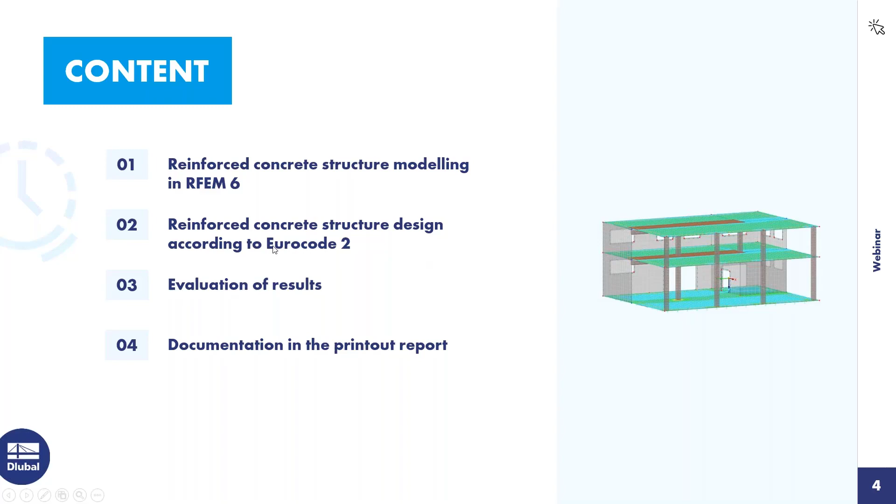Reinforced concrete structures according to the Eurocode. I will design also a T-section here under the slab. Then I will evaluate the results. I will discuss the results, and will show how we can work with the graphical display of the results, and also how we can print the results into the printout report and document our calculation. I go now directly into the RFEM structure.

The structure, the members and the slabs, was already defined. I only give you a short overview of the used objects. The basics of the reinforced concrete design, the design of members, the reinforcement, and also the design by using the member representatives if we have more similar members, was shown in the first webinar for reinforced concrete structures, which was shown in November of last year. There the basic steps are shown, how you can define the properties and the settings, and my colleague Caroline will write the link into the chat where you can find this webinar. It is very good for the beginning.

So therefore, I will go today especially into the design things which weren't shown in the first webinar. The punching design was not so detailed, and also not the rib design. The structure is a concrete structure with C30/37, and I use sections for the columns with 450 by 450 millimeters, and I have already prepared a section for the T-section, which is named in our program as rib. In the following description, I will always use the name rib for the T-section.

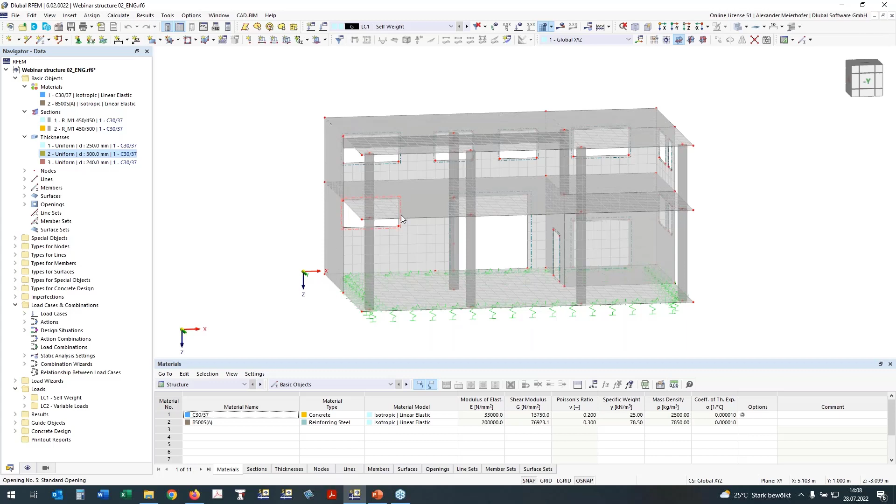The building now has elastic springs, so elastic support, and this will have also influence later in the settings for the deflection design, which I will show you.

At first, I want to deal with such nodes where we have the connection between the columns and the slab. Here we should place mesh refinements to have a better FE mesh.

For this, I go to the data navigator, where by double click I can open a new nodal mesh refinement, give there my settings, which I have for radius 1 meter, and the inner target FE length is 15 centimeters. It comes from the dimension of the cross section of the columns.

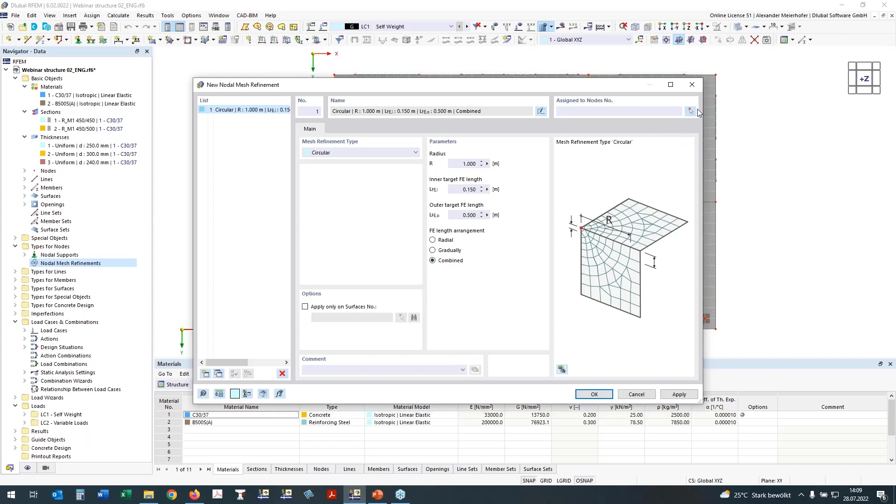For the length arrangement, I use the combined approach, and now I will assign the nodes with two rectangulars where I want to have the refinement. If we take it through in the isometric view, we will see I have it caught, and everywhere was now my mesh refinement.

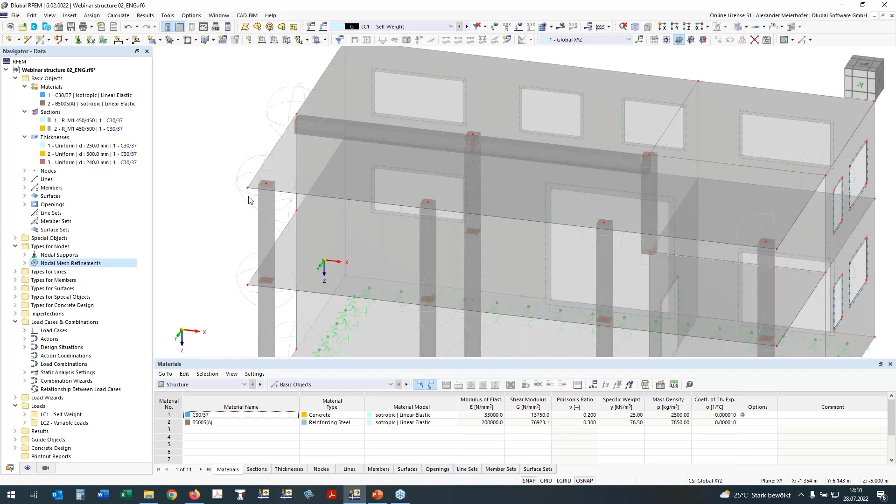On these nodes, from the column and the slab, we have also singularities, and how we can deal in the concrete design with these singularities is described in a very good knowledge base article on our website, which I want to advise you. Caroline will also send the link to this technical article in our chat, so you can find it very easily.

I will continue and select one approach, which is the use of the surface result adjustment. It means I will select or define the area which is exactly the width of the column, and set there the inner forces of the surface to 0.

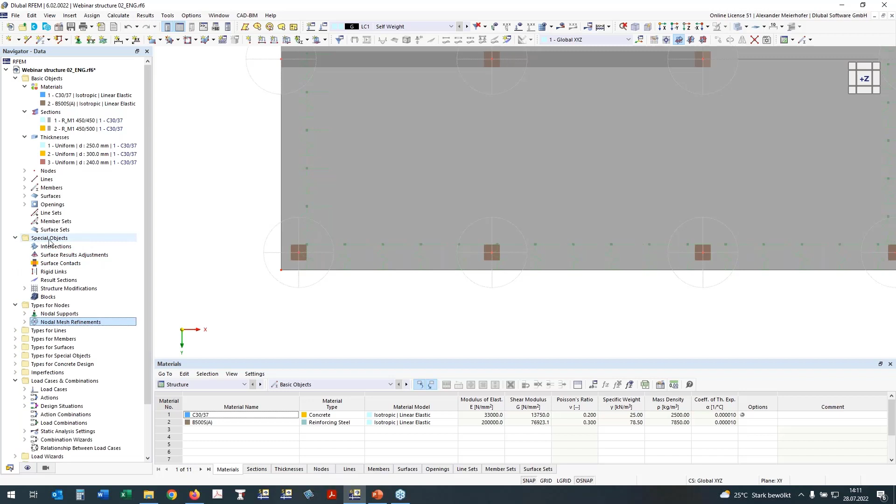Surface result adjustment can be found on the special objects. By double click, I can open the dialog, and now we can define a new rectangle result adjustment with the dimension of our columns.

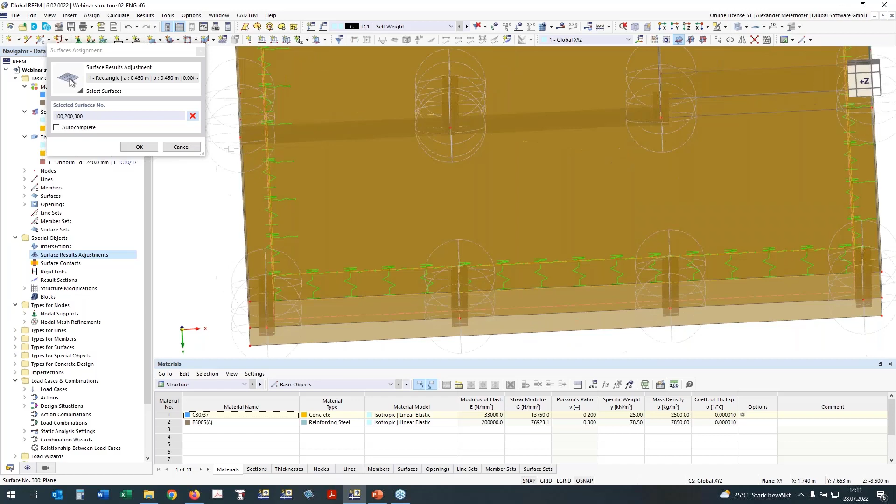I want to have it on all 3 surfaces, and you see the number of my surfaces was so chosen that I know where it is placed. So 100 is the slab on grade, 200 the slab over the ground floor, and 300 is the slab over the first floor.

If I press OK, I have already assigned the surfaces, and now I have to define the center of my adjustment. Here by copy, I can simply copy this adjustment and set only the new center of the result adjustments, and then I will have it in all areas.

I make one new and want to define it also over the wall. The width is 25 centimeters, and I defined a little bit bigger area, and defined it here because here is a wall. Define it also in this area.

I made one mistake. Now I forgot to define the adjustment type. I want to set it to 0, and I want to set all inner forces to 0, and this should be done for all defined adjustments. So I was one step too fast before. This should be done before I copy it, and then it is also always in the right setting.

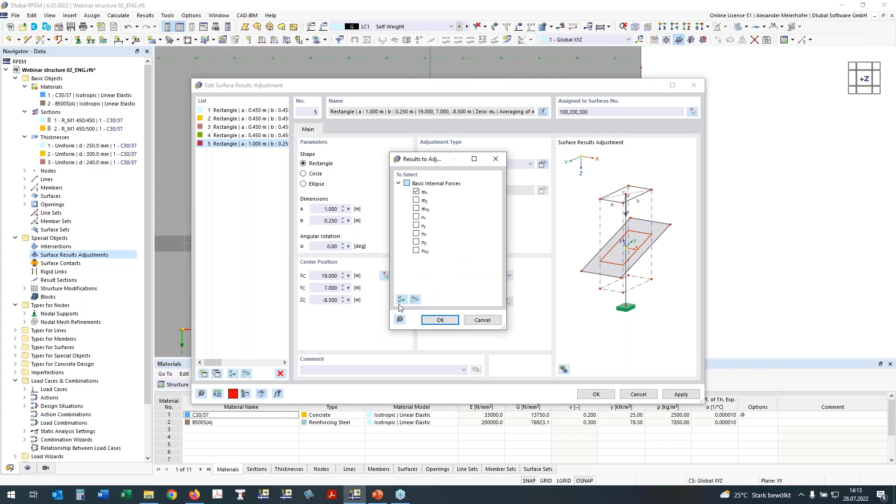By OK, it will be placed. We can see it, and we can also work here by drag and drop. We copy it by drag and drop. If we press the Control key, you can put it by drag and drop, and it's very simple to work with it.

So this is then for the connection of the columns to the slab. One additional setting for the slab is necessary. I want to have here hinges over the length of the supported line.

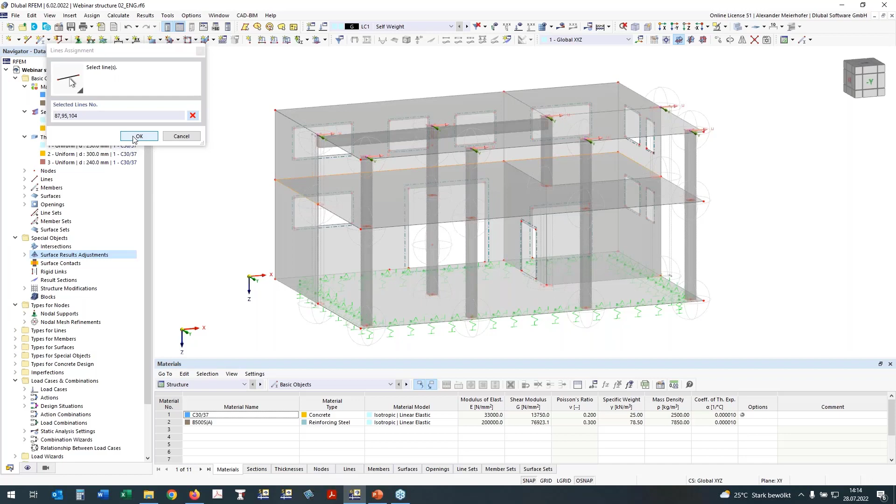The definition is very simple. We make double click on the surfaces, and the edit surface dialog will open. Activate hinges, and in hinges I click to select lines, press Control, and then I have selected 3 lines where I want to have hinges, and the hinge type is as default already the moment hinge, and I will put it to all lines, the line hinges number 1.

Okay, it's ready now, and if we take a look at our refinement, it is everywhere placed, and also the adjustment. In the display navigator, we can deactivate the mesh refinements because I don't need it anymore for the work now, and the graphic is then more clear for the presentation.

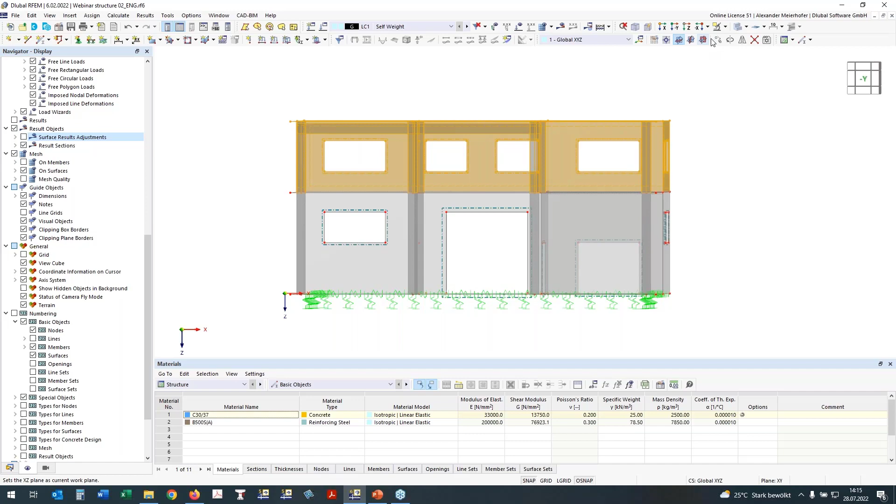As next step, I will define the rib for the slab over the ground. For this, I will hide the first floor by selection, and now I have the first floor.

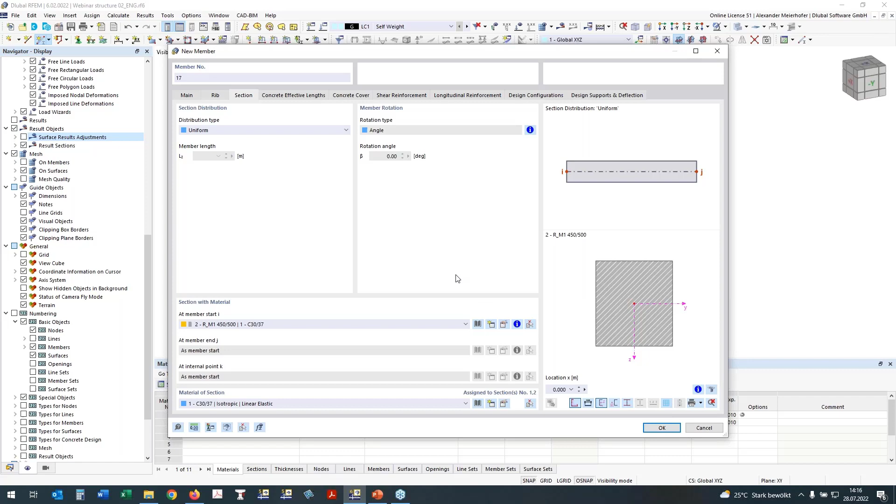By using new member, I can define now section rib by selection of the section number 2, which should be used for the web. The web should be 500 millimeter high. I can define now the rib from here to here, and also from here to here. Oh, something was wrong. Okay, I do it again.

I know what was the topic. I will make the selection new and select only the slab which I want to show. So the new member is the same section, section number 2, and then from here to here.

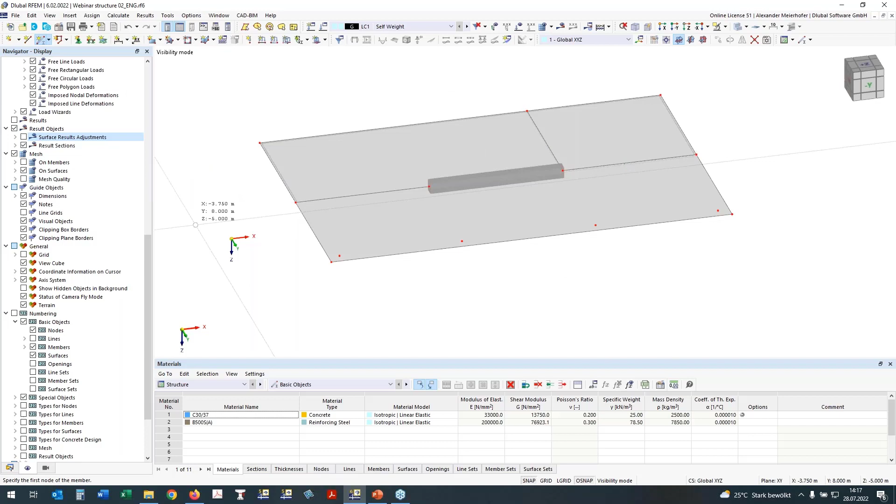By escape, I come to another point. So if we take a look to the complete view, we see here in the first part I took care about the rib. I go now in the rib section, and this is a very new feature that we can now also define more sections or segments during one length of the members. This is completely new developed.

I use here the calculation of the width, integration width according to Eurocode 2, and the splitting of the segments can be done in 50%, 85%, and also 100%. And we see now we have more different integration points. Here we have an inner support, and it means we have to consider also for the calculation of the integration width the length of the neighbored span length. So I have to define here 180, and I have now my different integration width.

We have here also a new option that we can make here a distribution, a linear distribution from the integration width, and now we have defined the rib for the design.

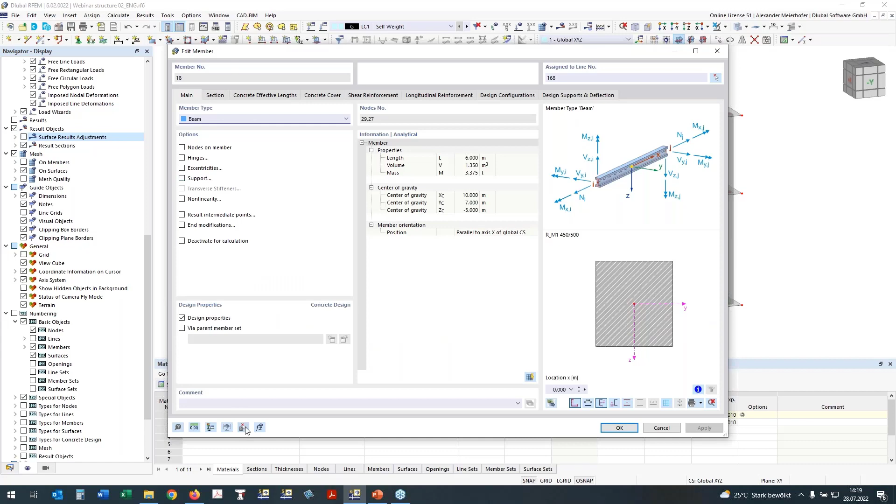For the second member, I use here the copy of object selections. It's a very nice tool. If I click here, we have here really copied all inputs. It's a rib, and only the thing which I have to change is that the end field is related to the segment, and this is for the user-defined point 80. And then the inputs for the static analysis is ready.

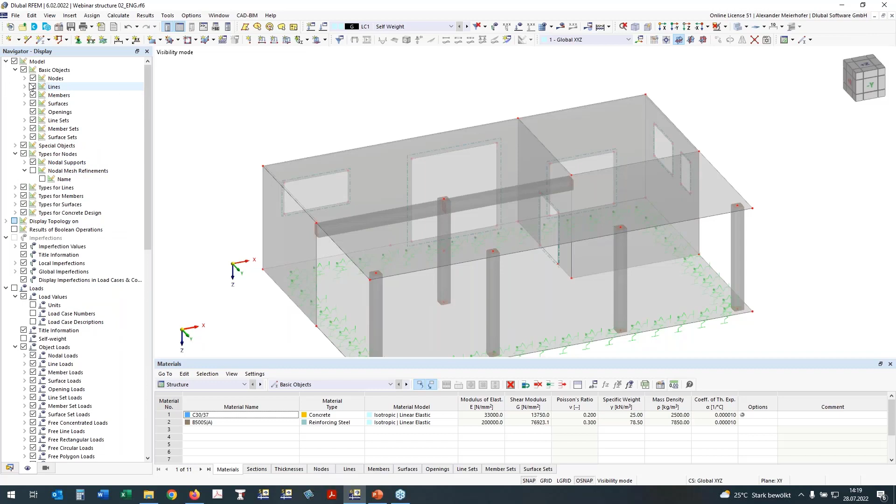And now I do it again, what I did before. And a very nice feature from RFEM 6 is now that we can show the rib section also in the graphic, and we see that the integration width is also shown here in our main graphic of RFEM.

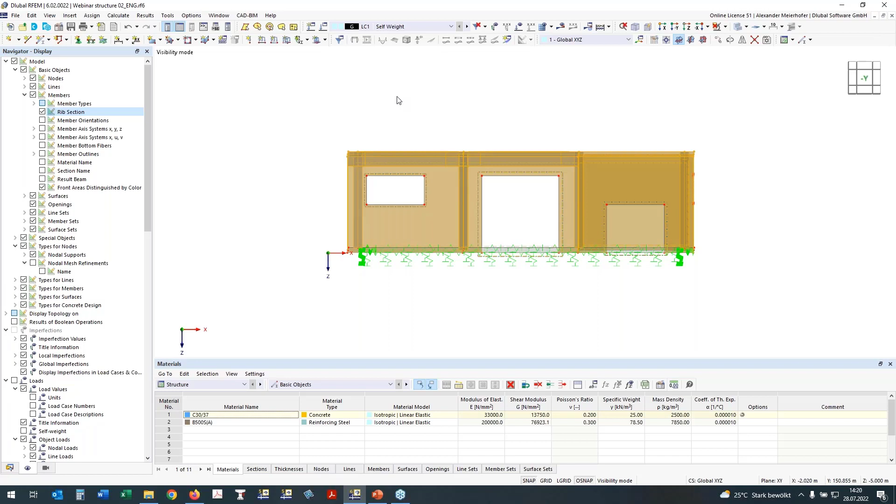Okay, now I will select again my slab here, and will continue with the definition of the design properties. The design properties for the reinforced concrete calculation are activated by double click. I come into the surface dialog, and I continue with the concrete cover.

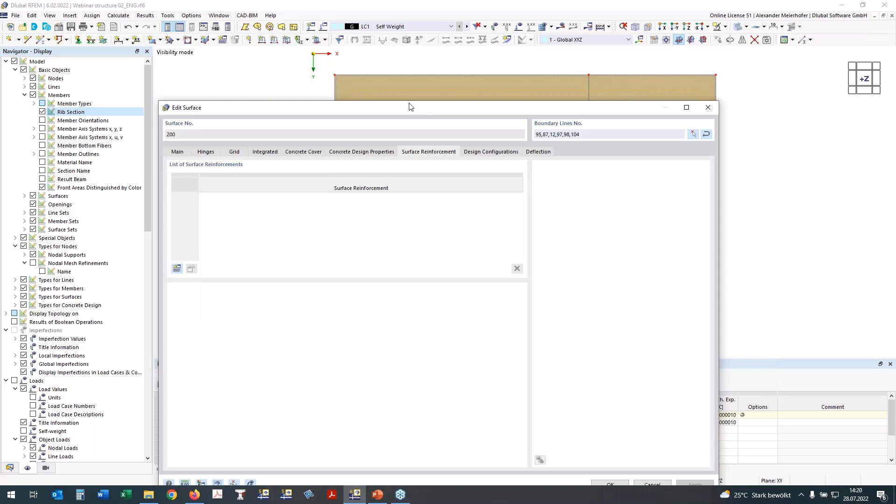The concrete exposure durability is defined by the exposure class, which is default to XC1. This is what I let it be, it's okay. The design direction of the reinforcement is the first direction goes in X. This is also default, which I will not change. And here is one important topic. In the surface, I need a surface reinforcement for the diameters so that I will know the static depth for the calculation. I just design a type of basic reinforcement.

Which will be in both directions, the diameter 10 with a distance also 10 centimeters, and by pressing OK it will be then assigned to the surface. Here are listed design configurations, which I don't discuss today. This was in the first webinar very detailed. I will later take a look to the serviceability configuration.

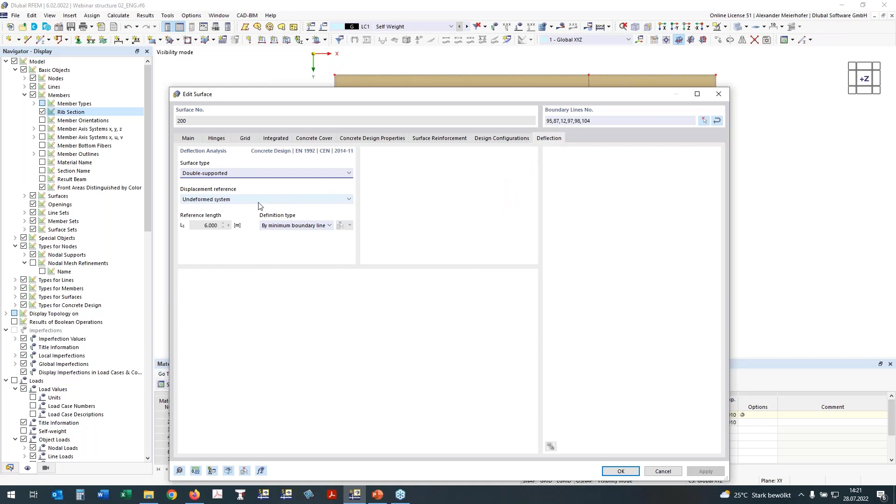But here's one very important thing, which I mentioned before at the beginning. We have an elastic supported structure. Therefore, it is an advantage to relate the deflection to a also deformed slab or plane. And here I use the parallel moved slab as a reference plane for the deformation, and as reference length I will define it manually by 2 points and say my reference length for the maximum allowed deflection is from here to here. It's about 5.5 meters. By OK, I have defined all properties for the reinforcement design.

We can also take a look to the graphic. If we go to the types of concrete, we see here we have surface reinforcement longitudinal, and if we activate it, we see that the reinforcement is defined in this area.

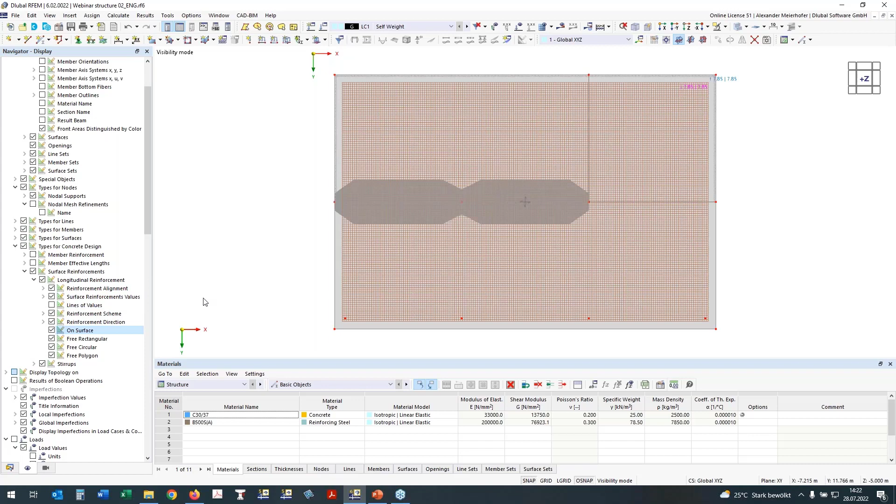Okay, I said that I will take care about the punching design of the nodes which are here. So it is like for all objects, we have to select it and go into the nodes or object dialog, edit nodes, and activate the design properties. Here it is only now important that we have to check for design of the punching groove, and then we will have here also assigned the punching groove in the add-on concrete.

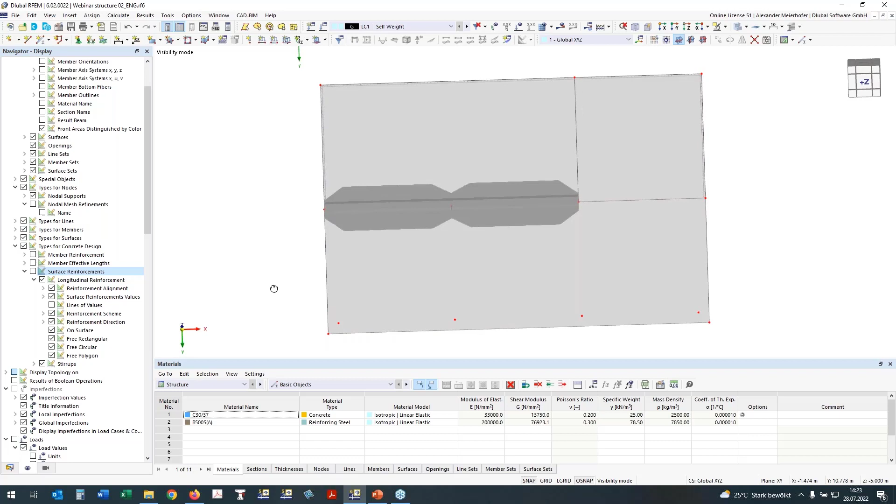I will go now to the definition of the ribs. Here we need also reinforcement. I want to design it not with two members, but with a set of members. So therefore I select both, press Control key, and say create a new set of member.

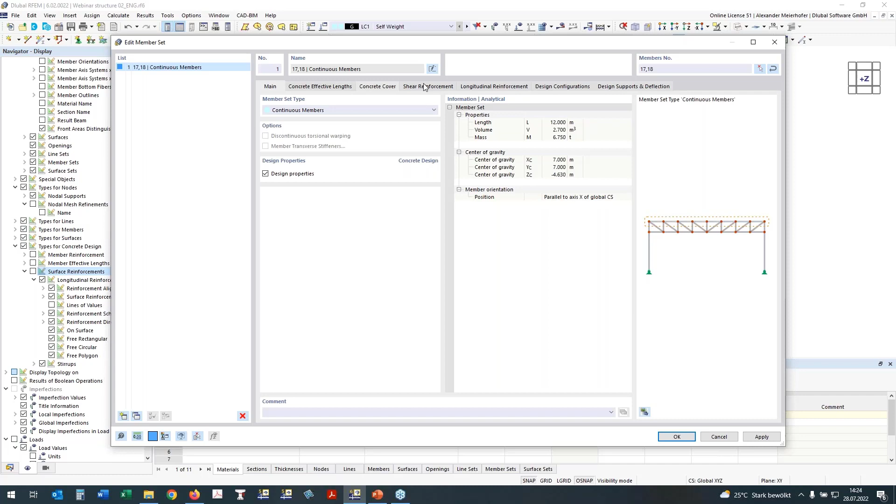And here we have now the new set of member, and I can say design properties for this set of member, and we see that there are now open all inputs for the design properties. It means the concrete cover is now shown, and here we have also the same durability which we have already used for the slab, XC1, and the shear reinforcement.

I will change the distance to 50 centimeters, and if we take a look in another view, then we see here the cross sections or the variable cross section of the rib is already shown here, and also there is the reinforcement, and I will go to the longitudinal reinforcement.

We see here the reinforcement which we have defined for the slab design is here already placed. If we go more, we will see it. It is activated by this icon. If somebody doesn't want it, you can deactivate it or let it. I want it, so therefore I will let it here.

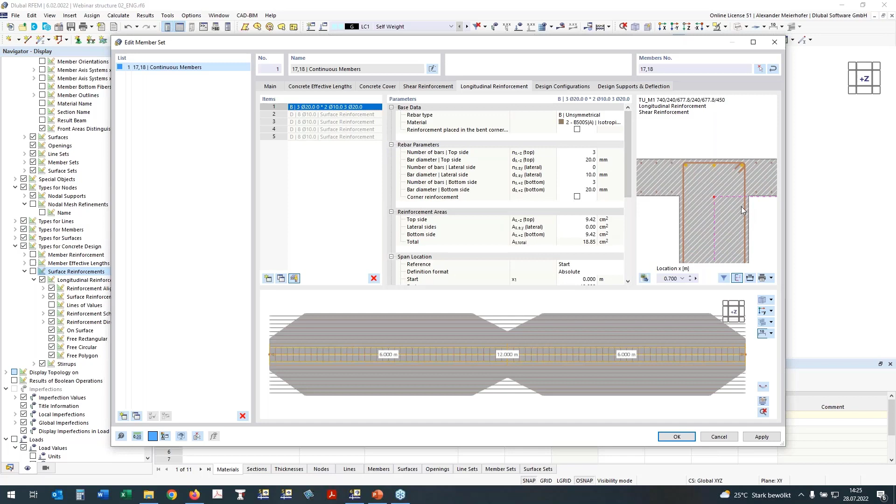But I will define now a different distribution of the longitudinal reinforcement. I want to have it unsymmetrical here in the web. So therefore on the top side I will define here these three rebars with diameter 20, but a lateral reinforcement also from 2 diameter 10.

And on the bottom side, I want to have 4 diameter 20. And it will be directly updated here in the graphic. Here is also the 3D graphic of the reinforcement, which can be used for control of the inputs.

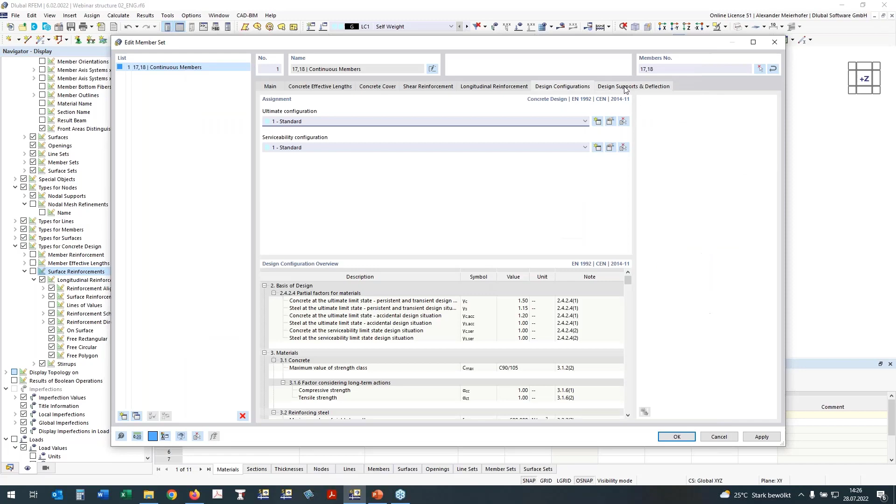Here we see a small reinforcement drawing, also the used shear reinforcement, which can be activated or deactivated. It's nice for control and for printing. Okay, I can close it. Design configuration is the same like for surfaces in all parts, and now is one important tab.

We have to define now the deflection properties or conditions. I want to check it only for the deflection in Z direction for the gravity loads, of course. And here is the point: my reference is then the deformed segment ends.

This is now also the point which I mentioned. We have an elastic supported structure, so it means also the supported ends will be a little bit displaced in Z, and this I don't want to have in the design check for the deflection.

Important is that I generate on the ends or on the middle some design supports. We have here design support in Z direction, and our wall is 250 millimeters. It's a monolithic connection, and will be used for the walls on the end and the start.

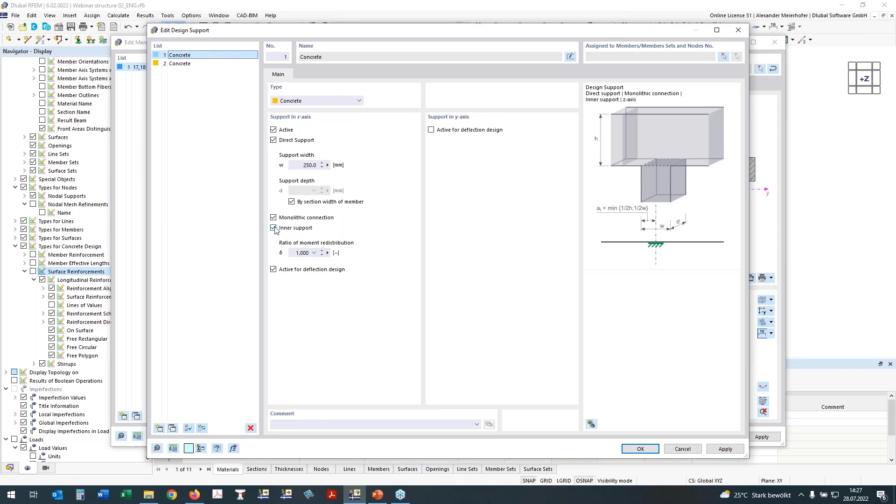I directly copy it and use here also the width for the columns, which are inner supports, and here I have to deactivate inner supports and press OK, and then it will be placed directly at the beginning.

I will change here the view to see it. Here we have the first one, and at the end it will be also placed, with the 250 millimeters width, and in the center I will also use the design support, but it is now for the column and it's bigger, it's 450 millimeters.

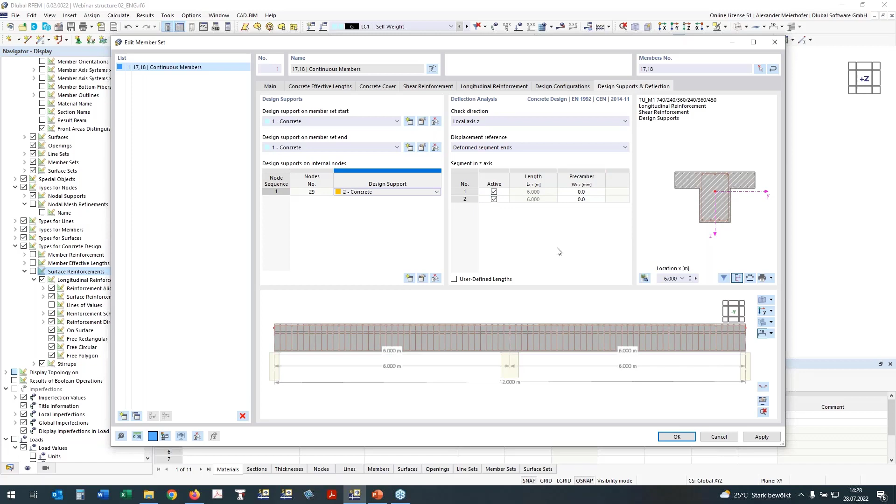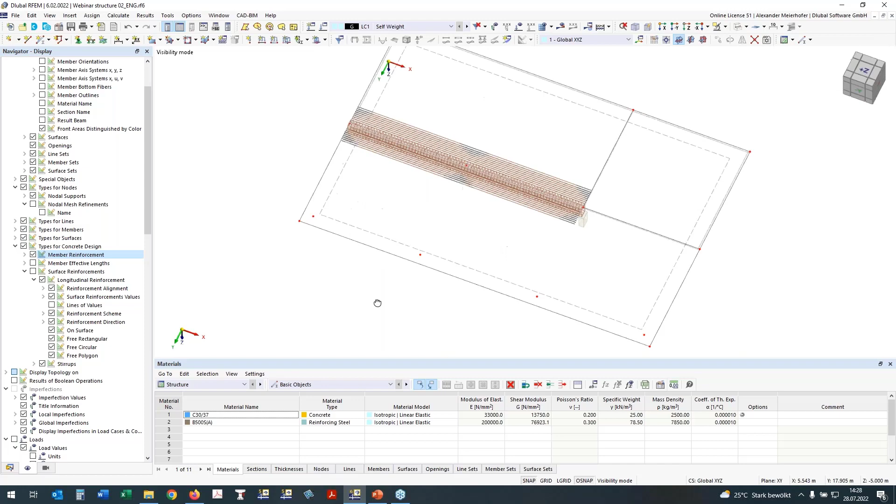And we see here now for deflection we have here some lengths, 6 meters and 6 meters, and if we have some pre-camber we could define it here, but in this case I don't have it. But okay, we can confirm the inputs, and also we can check the member reinforcement and display it, and see that everything is okay.

Before I start with the calculation, I will make now new object selections. Have to be a little bit bigger. Create new object selection, and the advantage which will be done with this object selection you will see immediately after closing the dialog.

This is my slab over ground floor, and I press OK. And now we have here in the guide objects, the object selections, and you see I have already done a little bit more, but the new one is the object selection number 200.

And if I go now to the concrete add-on, I can use the object selections directly to define all objects which are there in the add-on. It is then replaced, and it will only show objects, and it is very good to organize the work.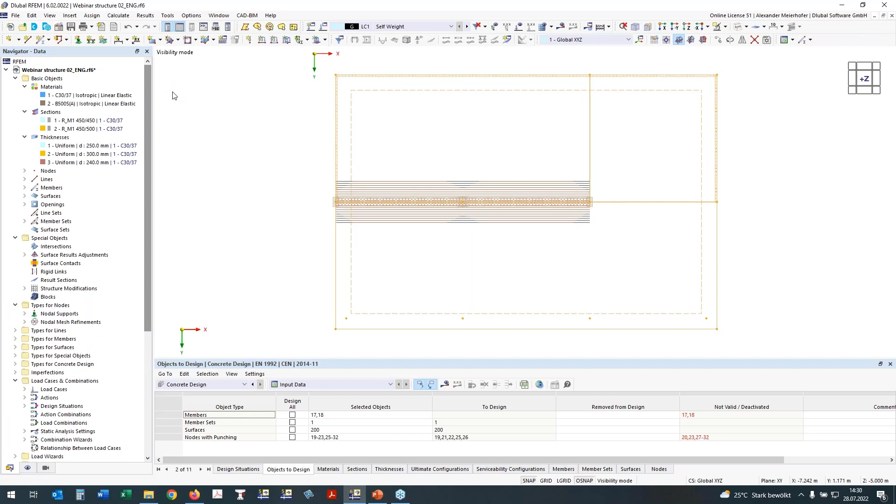Before I start the concrete design, one hint about what you have to check in the basic settings. You have to activate the concrete add-on in the design add-ons, and in the standards you have to define the used standard for reinforced concrete design. Here I will use the Eurocode 2 with the original rules, so without national annexes.

And if we have the loads, this is also one additional hint. I have defined a load case, self-weight and variable loads. We have to define the action category there. It was for office. And in the base data, I have the combination group and the combination wizard defined.

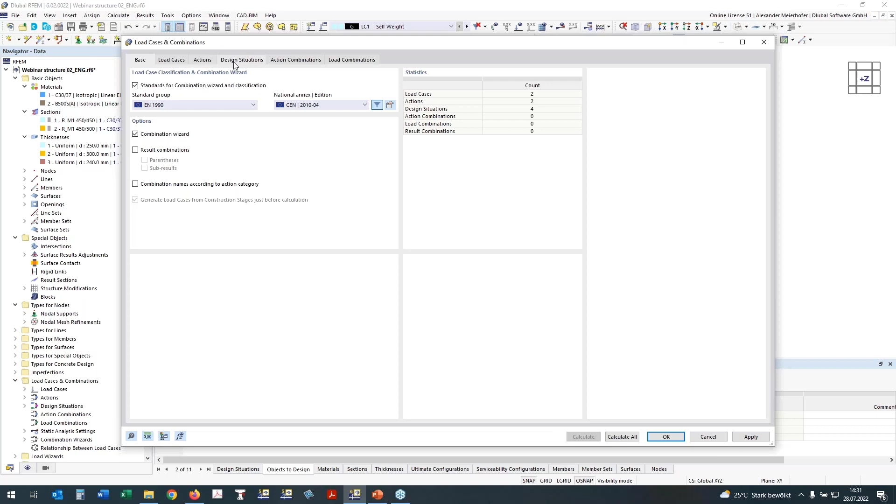And in the design situations the serviceability and the ultimate limit state design situations will then be listed automatically. And here will be the list of all activated design add-ons. Here we work only for the concrete design, so I activated it for the concrete design, and all load cases related to this design situation will be calculated. I can multi-select it, and I have to select my combination wizard.

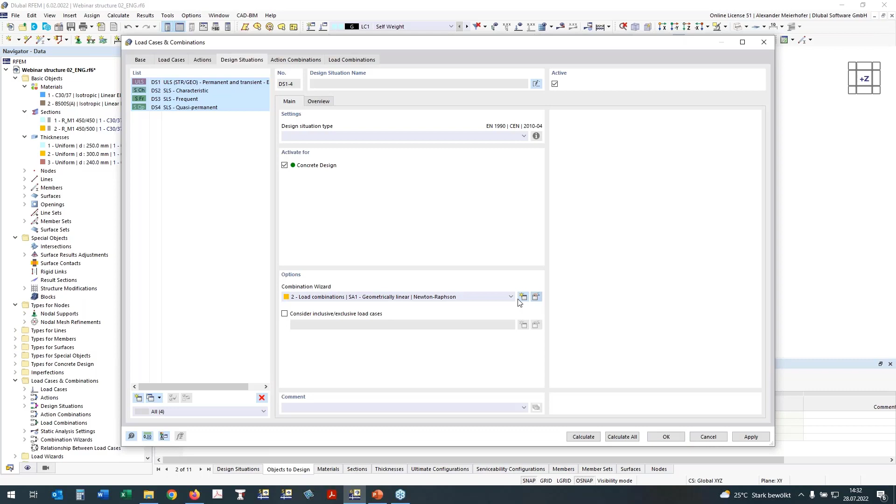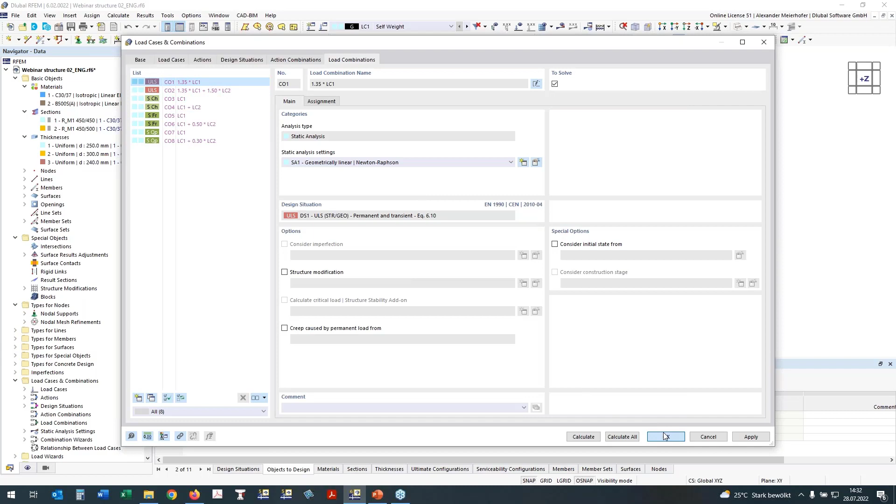The combination wizard here is defined so that we generate load combinations, and the static analysis should be done by first order and geometrically linear. If we go then to the load combinations tab, these combinations were generated automatically and will also be used in the design of the reinforcement.

Now I go back to the concrete add-on. We have here already designed the object selections. Material and sections are only listed for control. Here are the ultimate configurations or settings for the ultimate limit state. Here we have the serviceability state. I will take a look in the serviceability state

configuration, and here we have the stress check, or the crack analysis should be done by finding automatically the limit value for the crack width. So it is according to the defined exposure class. We have XC1, so I expect 0.4 in the calculation. The deflection limit is L, the reference length, divided by 250. And here is the crack state detection for the serviceability.

This I want to explain a little bit more, because this is really new, released two weeks ago. The first one is the crack state calculation for each associated load, so each load case or load combination will be calculated for itself. Crack state determination as envelope of all SLS design situations means the program checks all load cases defined for serviceability and then uses the cracked state, which is the safest setting.

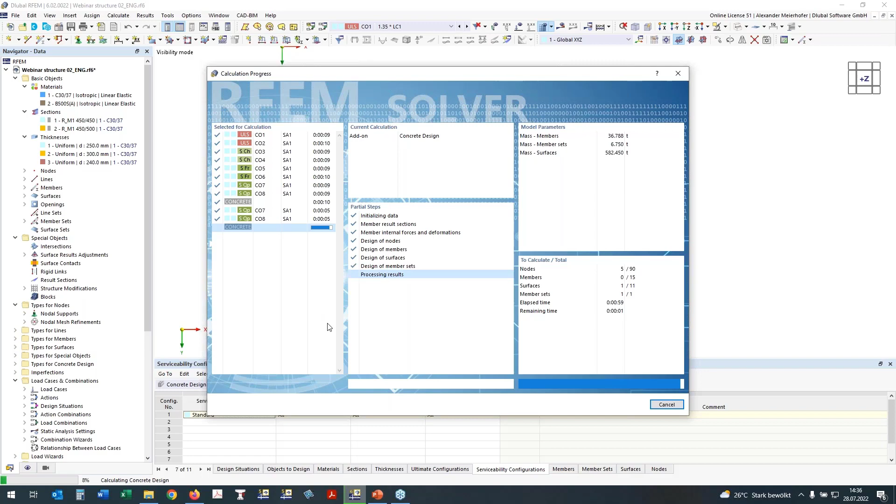Okay, so now we have an overview of what is fulfilled and what not. We have very detailed tables. Working with the tables was shown in the first webinar. Today I want to work more with the graphics and use only the settings for the member. Design ratios of the member we see here. Everything is clear here. I have 2% for the detailing of the spacing, and all design rules are okay.

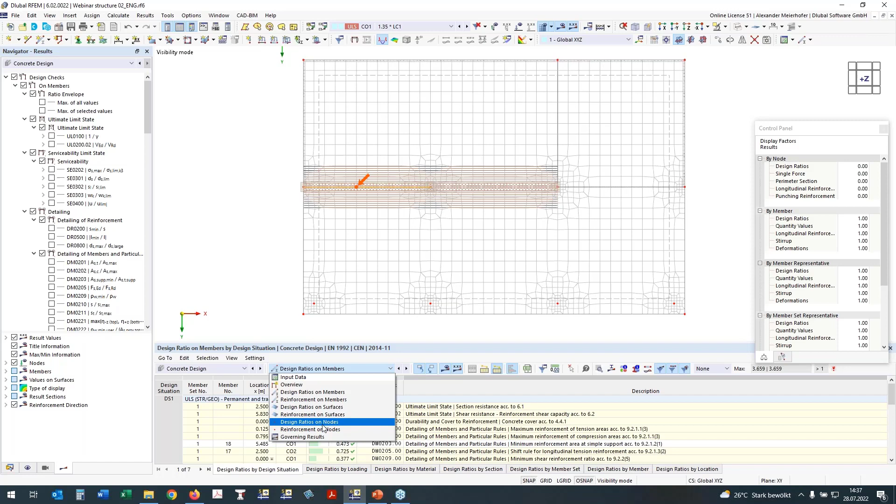The design ratios are also sorted by members, by surfaces, and by nodes. The design ratio for nodes is also new, and this is the design ratio for the punching proofs, and we see here it's not fulfilled.

I will go now to the graphical results, and firstly we take a look at the results of the surface, and we have here the result values. I want to activate it as only extreme values, and here we have the panel. So here is the ratio of the defined reinforcement, the ratio between the needed and the provided reinforcement. And here we see in the red areas too little reinforcement defined.

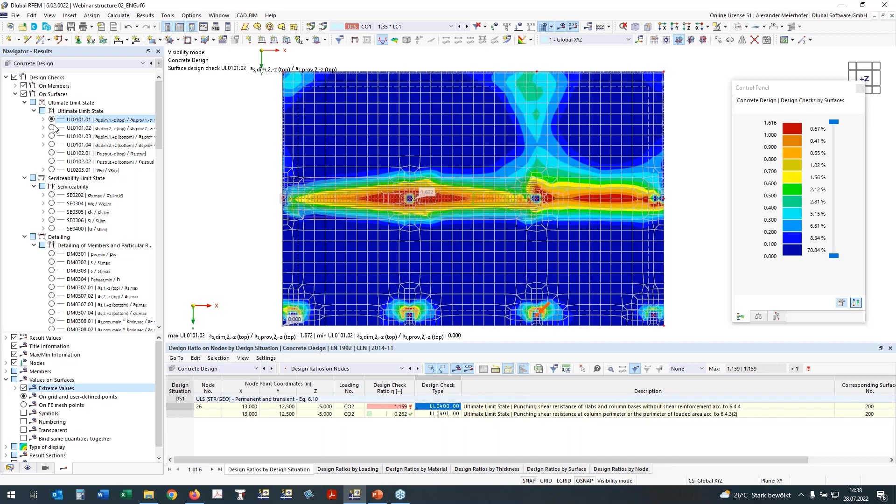On the top side, here is also a punching problem. I would expect, of course, more reinforcement here for the punching design. If we take a look at the bottom reinforcement in the first direction, we have everything in the green area. The maximum ratio is also on this small part, but the main area is under 1. And the bottom reinforcement in direction 2 is also okay. We have here a ratio of 93%.

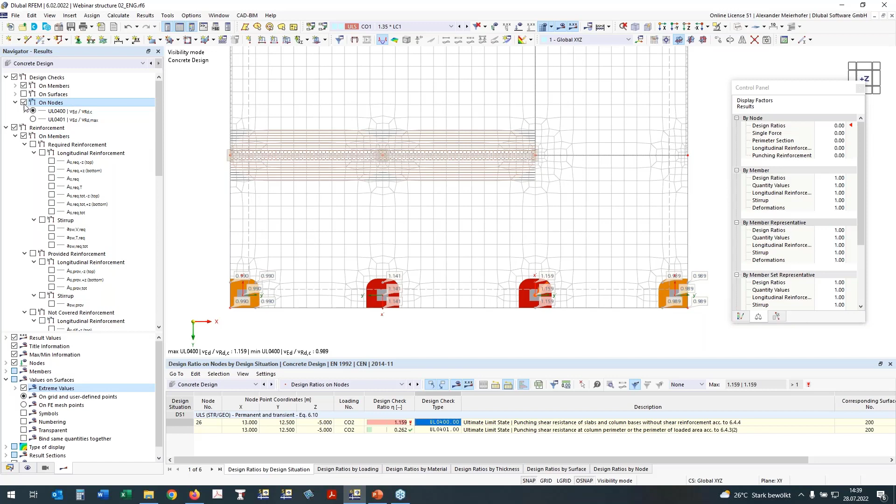The punching proofs of these nodes are now shown in the tree for nodes. And if we activate here now the view for nodes, we see the corner columns can be designed, but the columns in the center are overloaded, and we need more reinforcement here. To work with it, I will go now to the reinforcement and take a look also at the nodes and show if we need a required punching reinforcement.

And here we see for the required punching reinforcement, we need 0, but we need longitudinal reinforcement. In the configuration, I said, please calculate the required longitudinal reinforcement to avoid shear reinforcement. And we see if we would place here these 12 or 13 centimeters, everything would be fine.

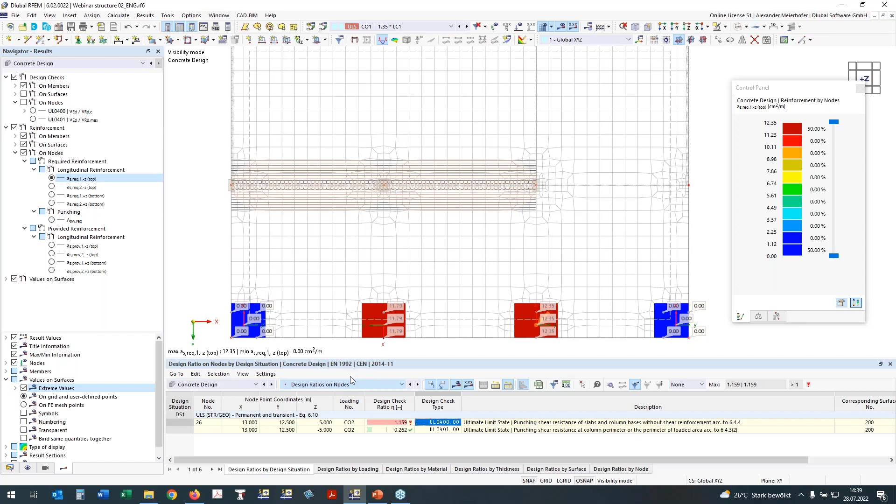I will now define the missing reinforcement. For this, I will go to the global settings of my add-on. I will deactivate the deletion of my add-on results if I change the reinforcement. And now I can work in the inputs. I deactivate also the mesh so that I have a nice view, and go now in the navigator to my types for concrete. And for types for concrete, we have the surface reinforcement.

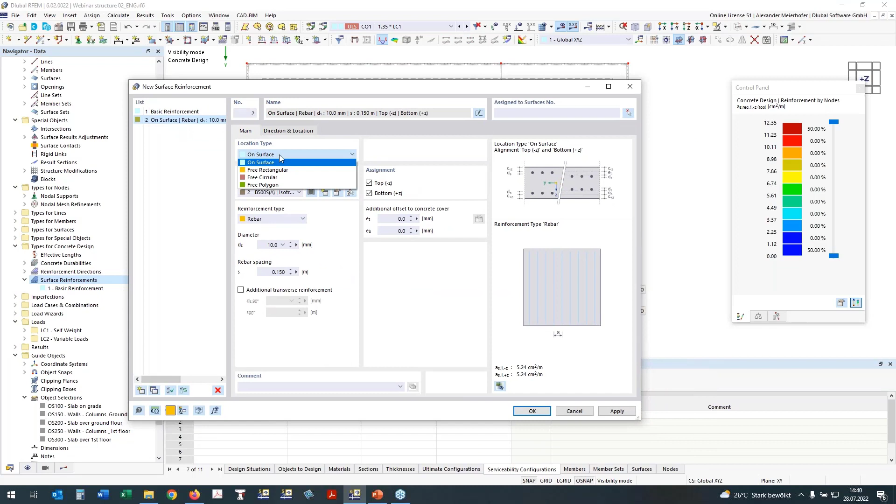With new surface reinforcement, I generate a new one, which is a free rectangle area. I assign it to my surface number 2, and the missing area here for punching is about 7.8, and I want to have it only in the top direction. And here is the area which I want to define. I activate my grid to have good coordinates. So I have a grid of 25 centimeters, and this area is already defined.

I copy it like it was for the result adjustments of the surfaces, and I can use really the same concept. Now I want to do the input also on the other missing parts. For this, I copy the existing one and go in the result navigator, so we can activate the graphic we want for surfaces, and say the surfaces have not covered reinforcement on the top side in this direction.

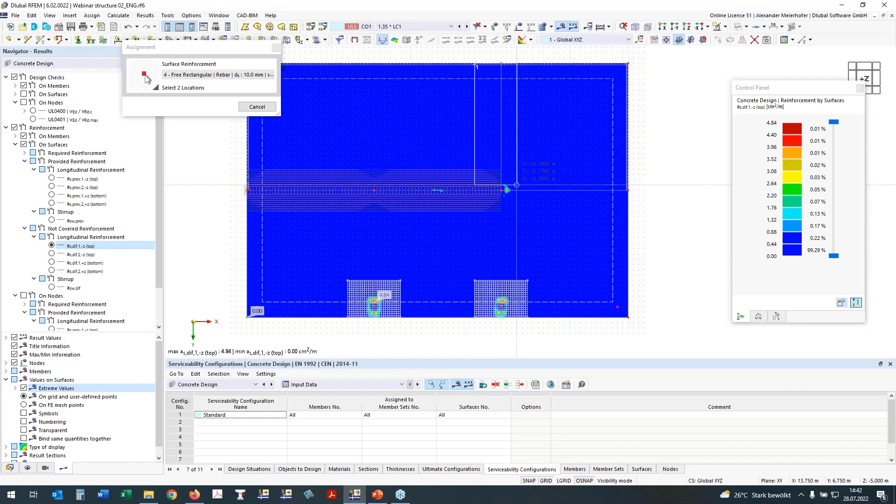I will define the same area over my supported line in the first direction, and in the second direction the same area, and take a look what is here. Here I need also some reinforcement, and take it over this length. It was a little too small, so you can also make it again, and by pressing OK, it is then confirmed, and it is in the structure.

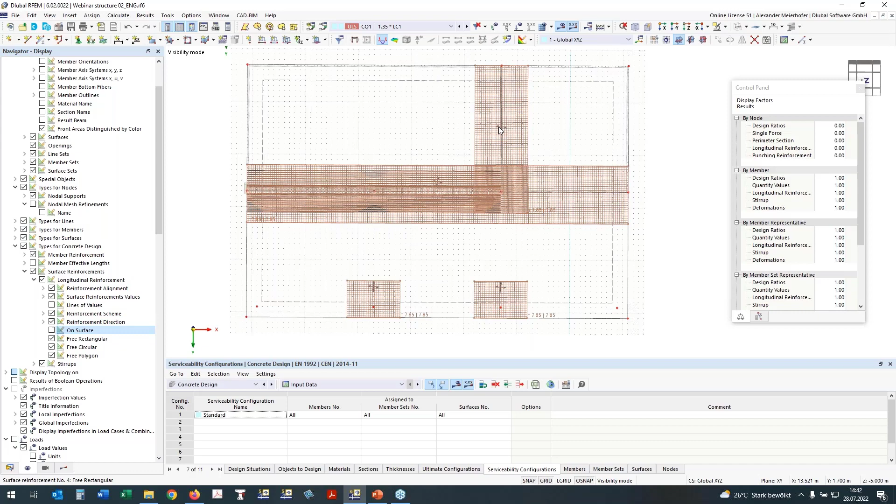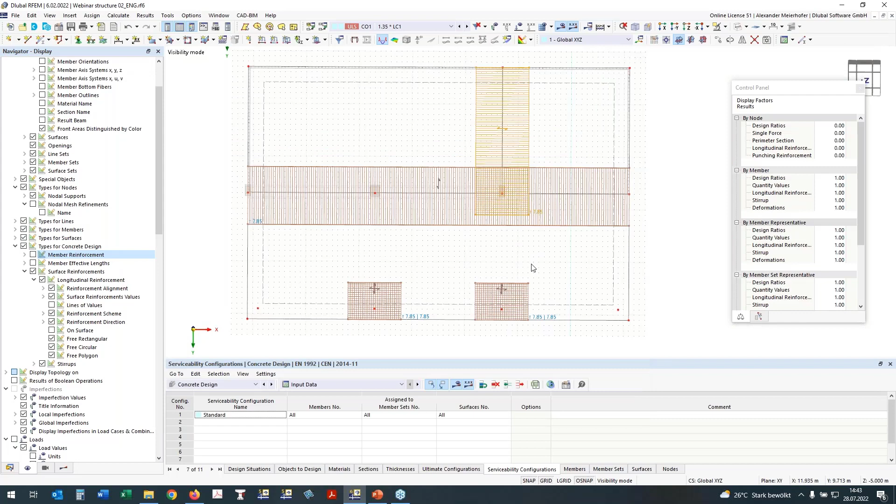For the surface, I can then take a look where my surface reinforcement is. I go to the surface reinforcement and we see what part of reinforcement is defined, and I can also check if the direction is right. Here I have defined one thing too much, I only want to have one direction, and it's the same here. By OK, we will see I have only one direction. So easy is the definition of this additional reinforcement.

Now I want to take care of the reinforcement in the rib. For this, I select it and change the view, and generate also a new object selection, the name should be the T section. Press OK. And here I work now with the design checks on members, and take a look at my cross-section resistance. We see I'm under 1, so everything is fine.

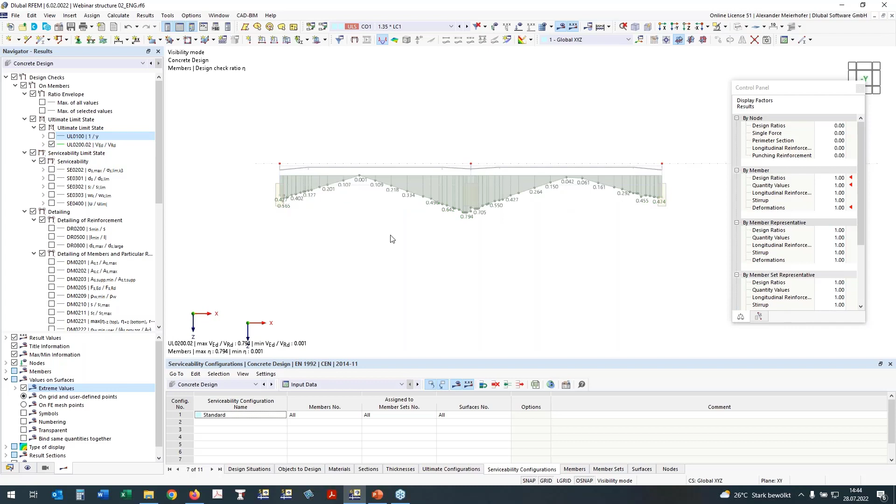If I take a look at the shear reinforcement, the shear proof is also fulfilled, so I need no additional inputs. The serviceability is done in this way that the stress of the steel is checked.

We can take a look at the crack width, and the crack width is also fulfilled. And now we want to show you the newest release. We have here the additional details in the result navigator. This is available since Monday in the new version, which you can download from the extranet of RFEM 6, and you can activate here also the direct value of the crack width.

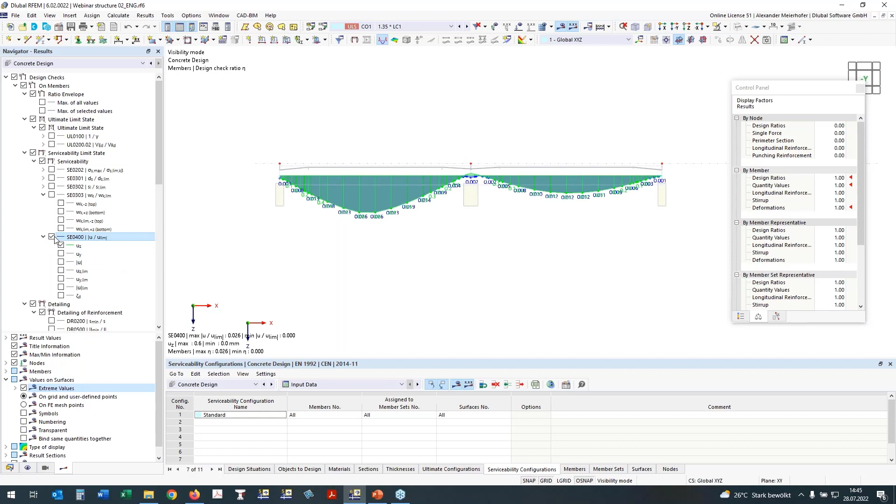For example, we have here only 0.026, and it is also for the deflection. The ratio is very small, and the existing deflection is now 0.6, and we see here it is related. Here is the end, it goes to 0, and this comes from the relation to the deformed structure.

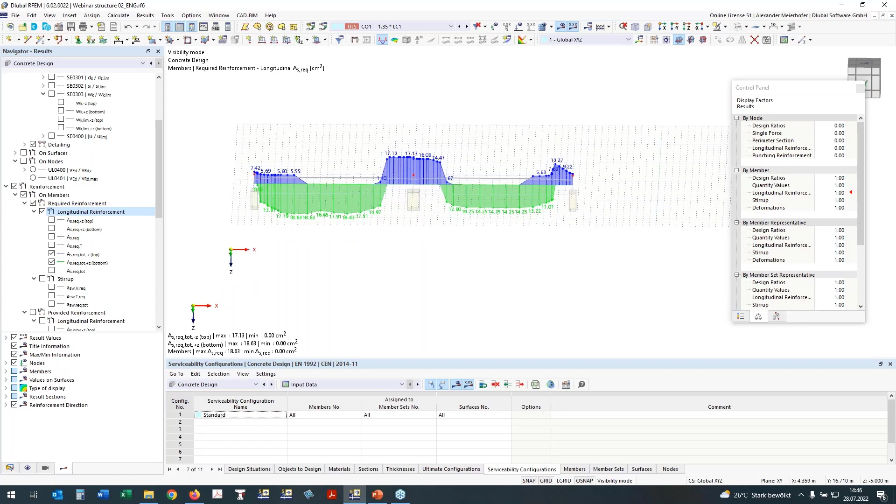Okay, if we take a look at the required reinforcement, it is also here in the table. Required reinforcement of members, As top, As bottom, and we can take a look at it. You have here the graphic, and if we want to print it to the protocol, we have to generate a new protocol. And what we have to consider is that the calculation must, of course, be done again.

We changed the reinforcement. For this, I go to the global settings, activate the deletion of the add-on results, and then it will be updated and deleted. And now I have to start the calculation of the concrete design add-on anew. You can do it also here in this icon and start only the calculation of the add-on. The static analysis results were not deleted because the reinforcement has no influence on them. Now it is only the calculation of the concrete add-on, which will be refreshed and done again.

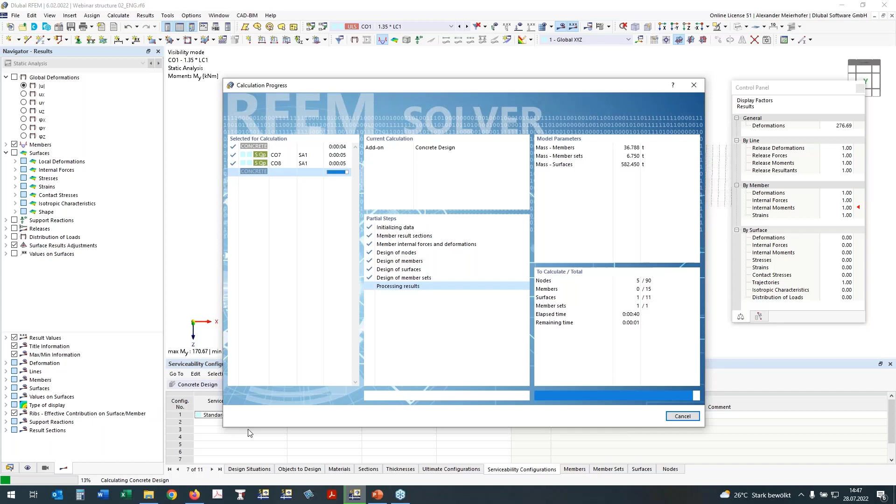And as I said before, this is a two-step calculation. And in the last step, we have here also again a concrete calculation for preparation of the results and the graphic. So now we have the updated results. Design ratio by nodes, by members is okay. And then I will go to the printout report in the navigator and show you very simply the work with the printout report.

If we generate a new printout report, I make it here for the concrete results or concrete design, and assume that all other documentation of the static analysis will be done separately in another printout report. Today I want to show only the design or the report of the concrete results. So types for members, types for surfaces we don't need, but types for concrete design is necessary for the durability and the surface reinforcement.

And what I also need is here the concrete design, where we have to discuss maybe also what is necessary. We see here it is possible to show every tab which is also available here in the add-on. It can be printed, but I want to have here only the design ratio by set of members, and for nodes and for surfaces. The reinforcement for members should be also only shown by member set, because I design only the member set. The provided reinforcement by member set, the not covered reinforcement I will not show. For the reinforcement by nodes, I leave it like it is. The design overview will be deactivated.

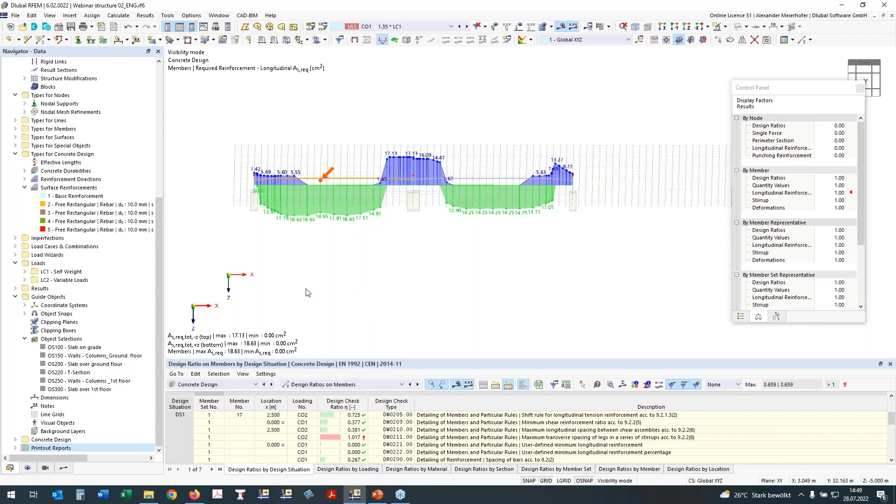By save and show, it will be generated, and the printout report is one of our new developments in RFEM 6. It is completely new. It is a separate file instance, which can be used here. It can be opened parallel to the RFEM calculation.

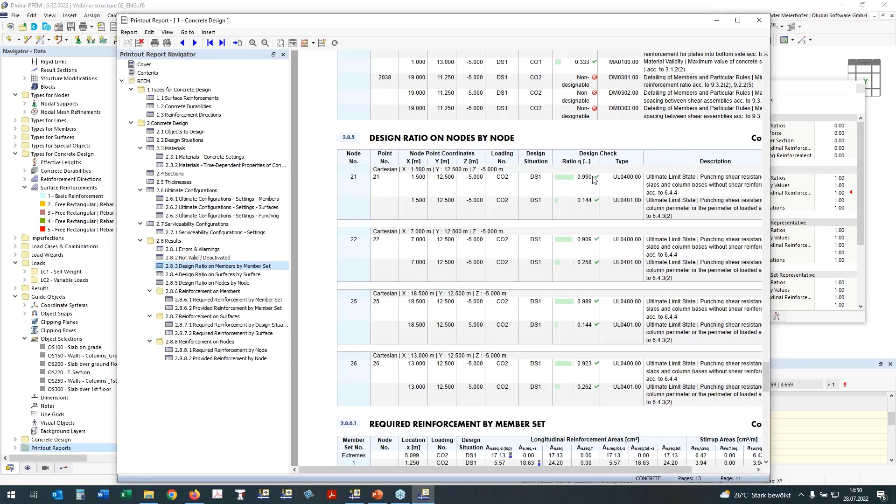And if we take a look at our results now, result members, then we go through results of set of members. Here is one, the green one is the crack control, which is overloaded. This we can check later. Detailing is 1%. It's okay. So from my side, it's okay. For the design ratio of the nodes, the punching design, all ratios are fulfilled.

And if we go to the required reinforcement by member sets, we will see the list of the required reinforcement. Here I want to show also how we can print the required reinforcement, because in my eyes a picture or a diagram is better than many tables. Here we can use the printout report, the graphic, and here I want to use the current one. New is also the possibility to define an area in RFEM to print it to the graphic.

Yeah. By 2 points. I will activate the grid. So we can move it, make it a little bit bigger. Okay. And this area will be then also saved and will be used for later.

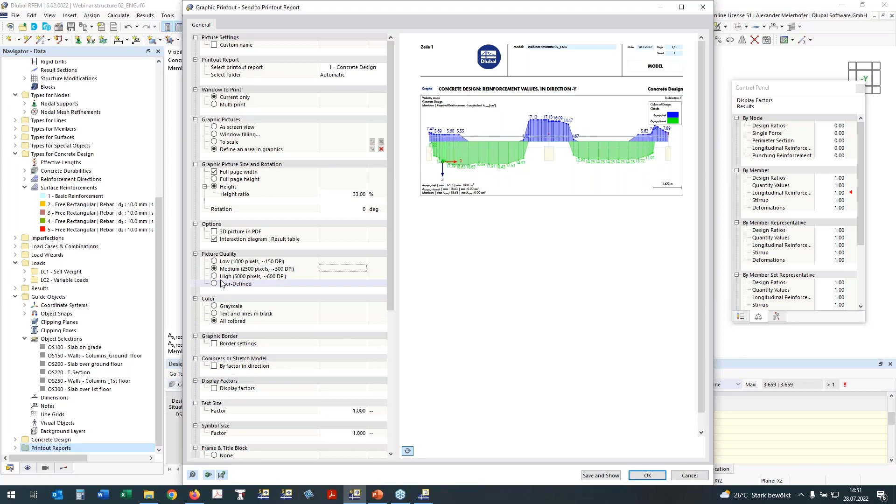I make it a little bit bigger in height, and the panel should be outside of the graphic. Yes. And by OK, it will be printed to the protocol. If we activate it, you can see it here and make it smaller.

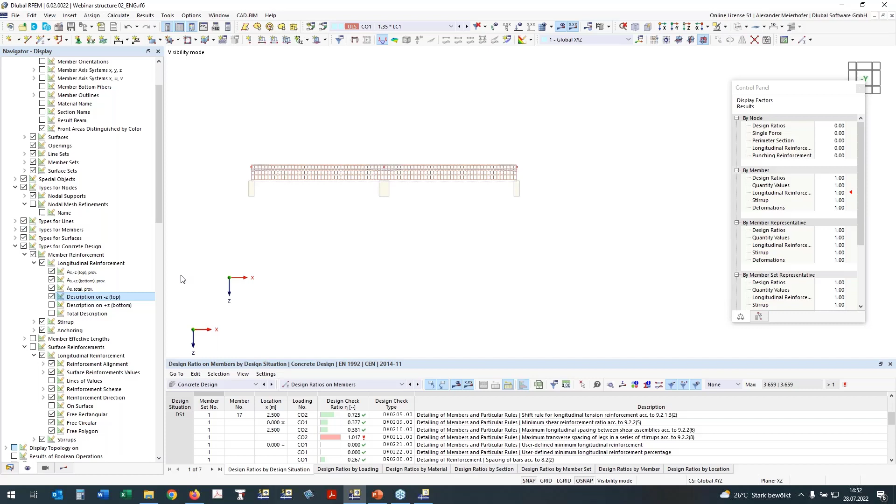Everything is here. And by using also the inputs of the reinforcement, we can now deactivate the design checks on the required reinforcement and activate our member reinforcement longitudinally and use the descriptions. And with description, we can print it directly into the protocol by the same functions.

The same icon will be pressed, so the area is the same. I don't change anything, and with OK, it will be printed. Now I will take care about the

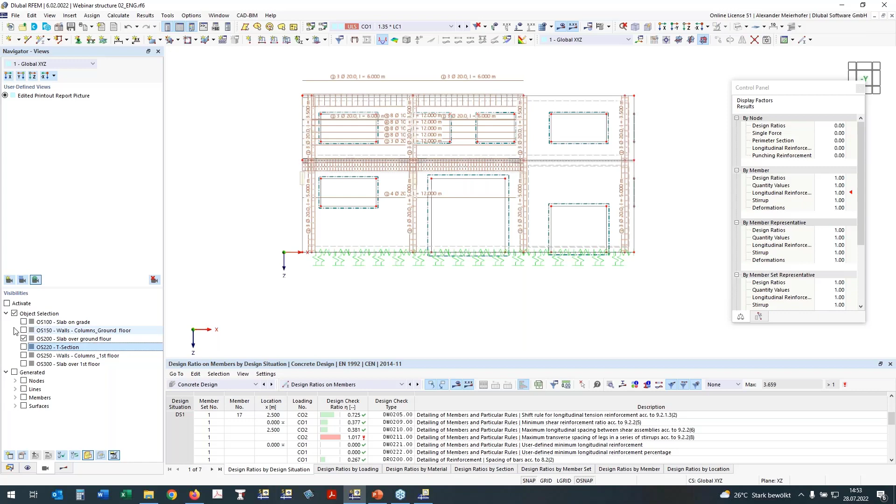slab. So for this, I will go to my view navigator, display view navigator, and this is the next advantage of the object selections. If you remember, I have here the slab over the ground floor, and if we take a look to the Z direction, now everything is activated what I have selected before, and I can continue with my presentation of the results for the slab.

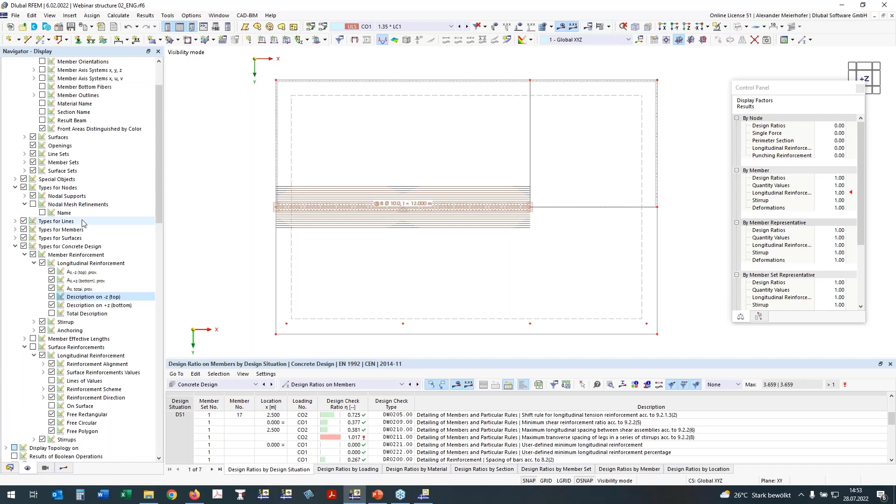Firstly, I deactivate my member reinforcement, and in the result navigator for the design checks of the surfaces, I go to the ratio of my longitudinal reinforcement on the top side. It is okay. The bottom was also okay. We take a look to the displacement. So this is the ratio like it is for members, and here is also the deflection.

Important for me now is the punching proof, because this was not fulfilled before. We see it is now under a smaller ratio. It's perfect. And we can now also print a documentation of our results.

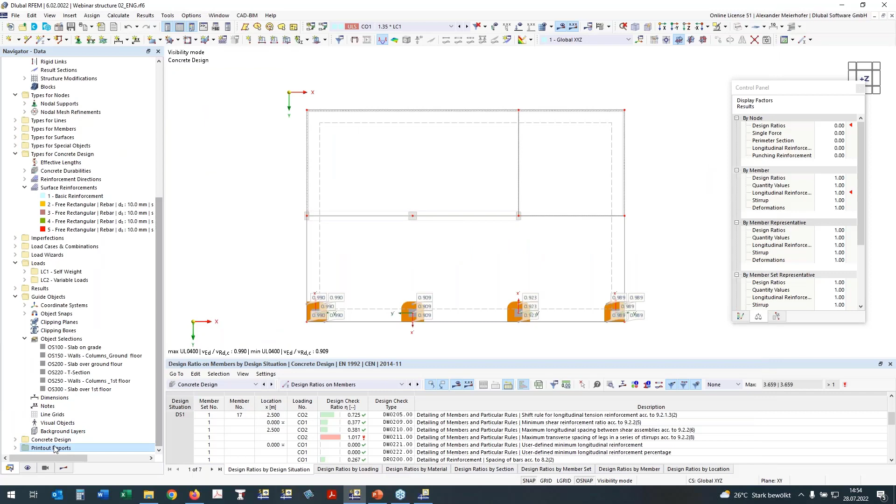I want to use now a bigger paper like it was done in the documentation. The first printout report, this is the format A4. I want to use now a bigger one for the plots. I make a new one, new printout report, and say this is only my annex for plots. And for this, I deactivate all settings here and generate a new pages format.

For this, I have to select a printer which is able to print bigger pages. So here it's my printer, which can print A3, but you need 7 millimeters distance on the bottom side, and I don't need a cover page. And with OK, it is saved, and save and show.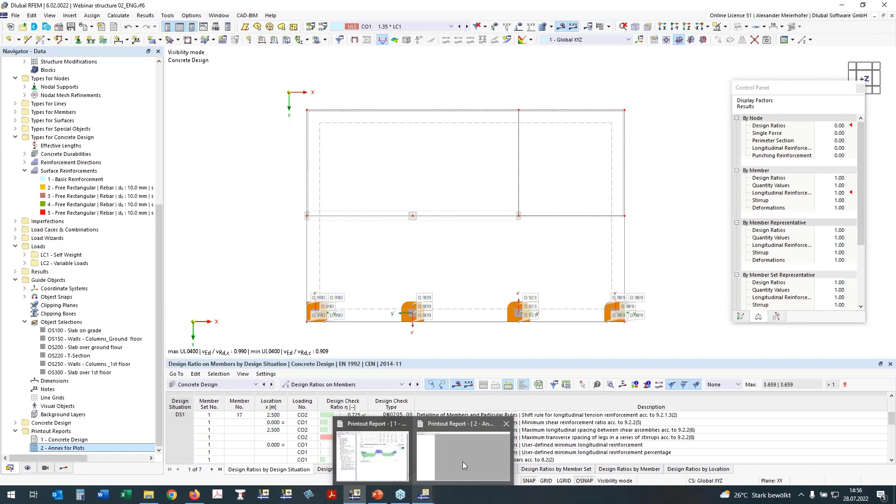I will get a new protocol, which is also shown then here, but it's empty until now, because I printed no reinforcement or no result there. I want to use now again the same one and print here then the surface. You see the last view is saved. I want to have a new one. I want to use it in Z, define it in the new area.

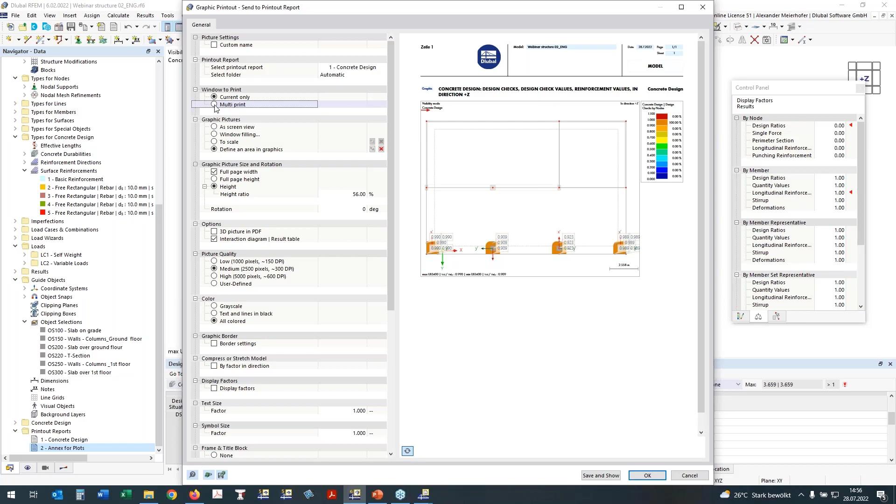So from here to here with OK, and with the multi-print, like I did it before, I can print all result diagrams which are necessary. Model is not necessary, load cases here not, and in the add-on. And now you see this navigator is really the same navigator like the result navigator in the main program, and we can really print all results which we want.

So here I print first the ratio between the provided and the required reinforcement, then the crack width calculation with top and bottom crack width, then the deflection design check with the uZ graphic. Detailing I don't show. I will also show the nodes, the punching nodes, and here is the used shear force, the punching force, which is set in the calculation.

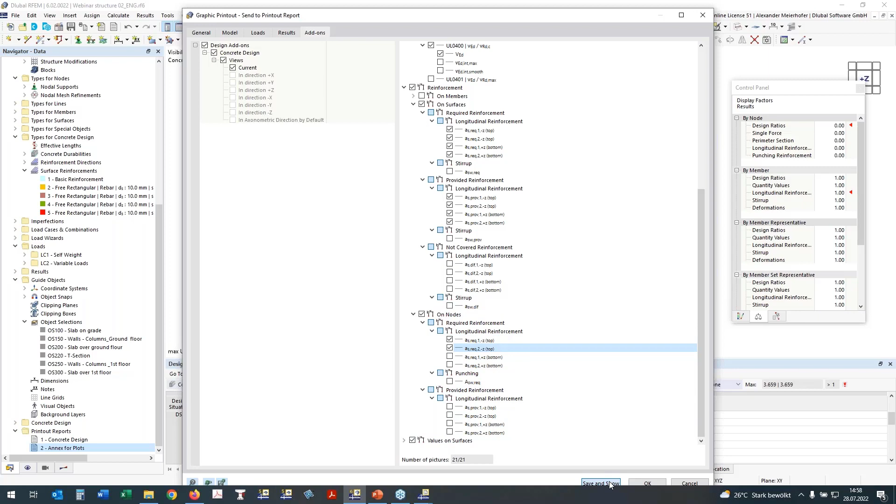This is a very nice graphic. On each node we see then the value which was assigned in the calculation. Required reinforcement, of course, I want to have shown my required reinforcement and also my provided reinforcement. For surfaces and for nodes, I need the required reinforcement on the top side, which must be placed for avoiding the punching reinforcement and to fulfill the punching proof without shear reinforcement now.

It is now started to generate. I have selected, of course, many graphics. It is started now to generate it here in RFEM, and then we will see it step by step here in our printout report. Oh, this was my mistake in the presentation. I selected the wrong one, so let us take a look here. The principle was the same.

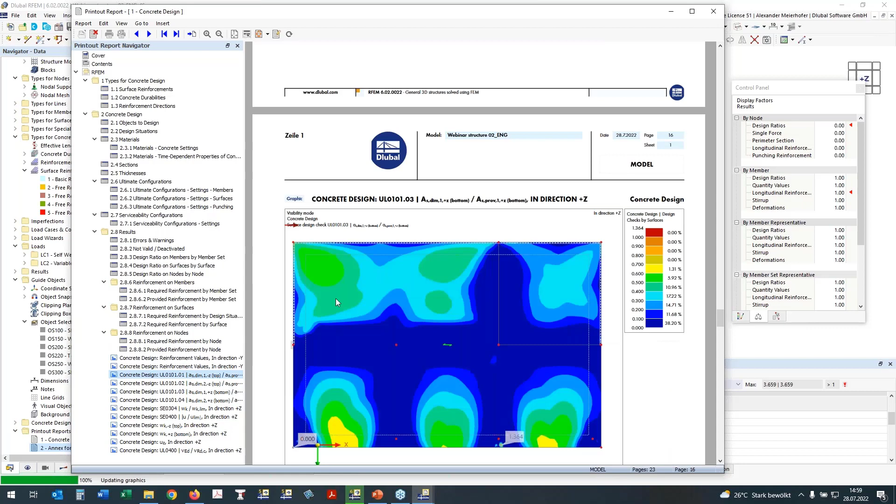Let us discuss the result. It's now in the printout report number 1. Here we see the reinforcement. Everything is fulfilled. Also the ratio of the top reinforcement, the bottom reinforcement, it's okay. Here we have the crack width and the ratio of the deflection, and here also the crack width on the top side and the crack width on the bottom side.

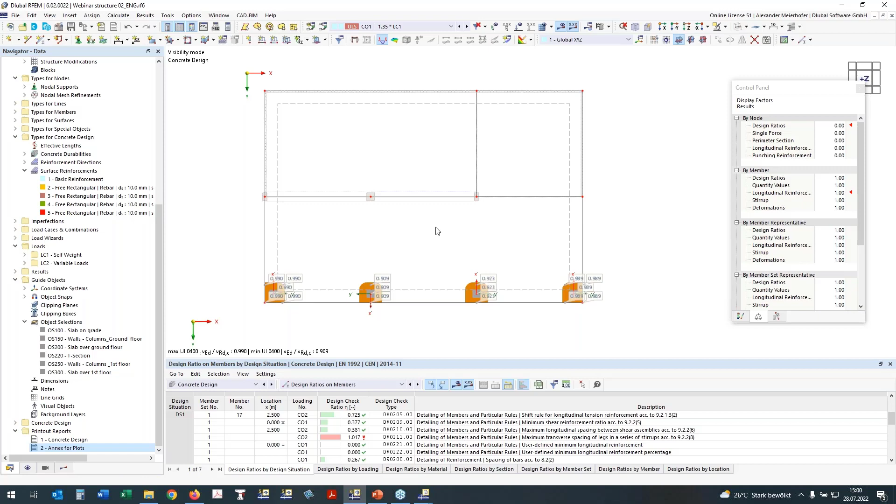Okay, this is then the design of this slab, and we are ready with the design of the member of the T-section, and also for the punching nodes. And I want to show you also the punching design of the foundation slab, where it is a special case.

Here we need an iteration of the critical perimeter. Where is the critical one? It's not 2D, it's iterative. And also we have to consider the soil stress under the ground slab. And this will be done now automatically.

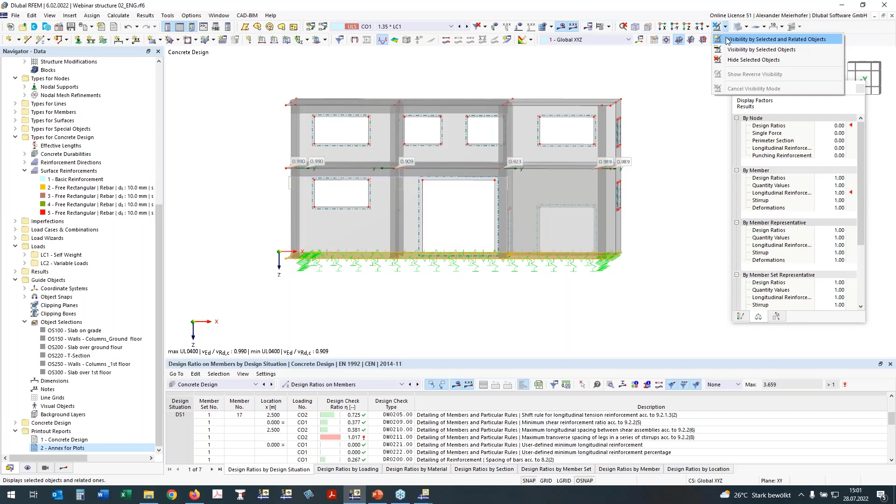I do it in the same way: I select only our slab now, take a view in the Z direction, and do the same as I did before in the presentation. I have to go to the node and say it's my punching design. Of course, I have new properties. Now the results will be deleted.

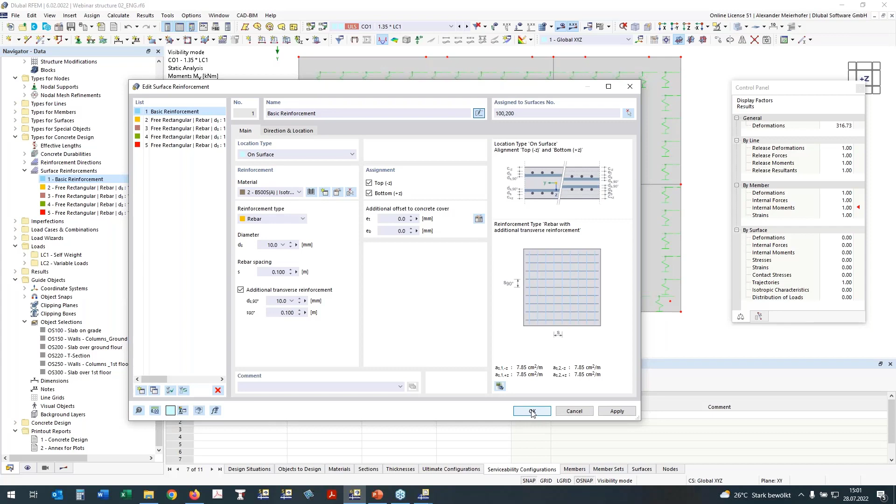Further, I have to define the reinforcement in the slab so that the punching proof can be done. This is very simple in the basic reinforcement. I use here also the number 100, which I said before. This will be my slab over the ground. Great. And then we can start the calculation of these points.

If we remember, we have here different types of punching design. We have here a wall at the edge of a slab. We have here a corner column. We have here a column at the edge, and we have here a wall corner in the center of a slab. And here we have an inner column in the center of a slab. And this will be done automatically in the design.

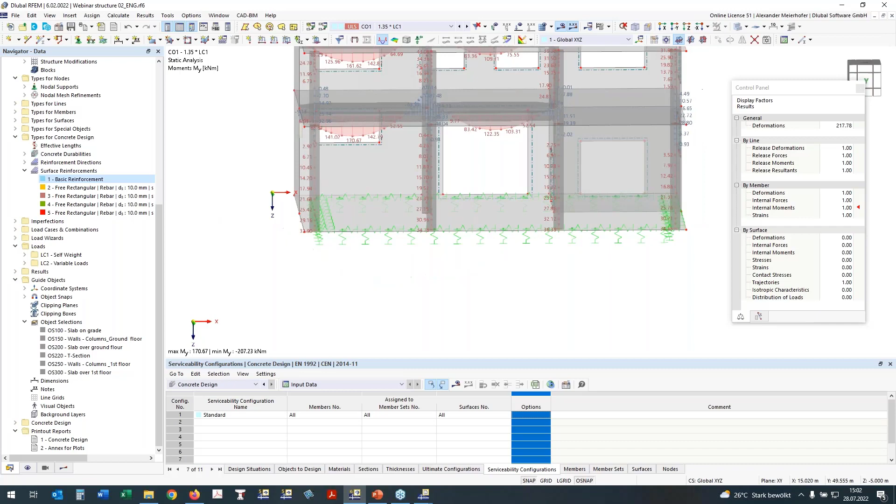I will go to my concrete design. This is now only for presentation, how the iteration will work. For selection, I go the same way as before. Say, please design this node for the punching design. Okay. Member sets I don't want, and press OK. And now I will calculate the punching proof for this node on the foundation slab.

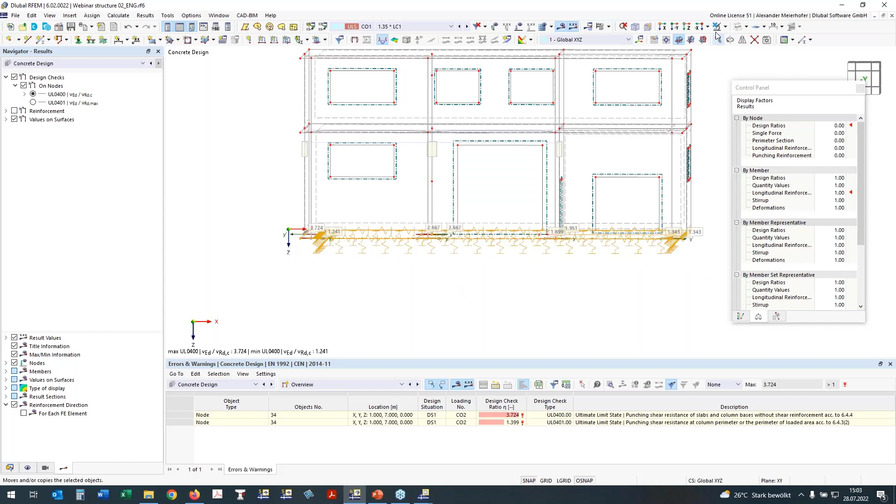And we see, I will go to another view, Z direction, it's better. And we see that the wall end is found; the geometry is found automatically. It's a wall end. Here we have the columns, and here we have a corner. We see also the result of the iteration of finding the critical section. Here it's a very small distance, and here we go until 2d.

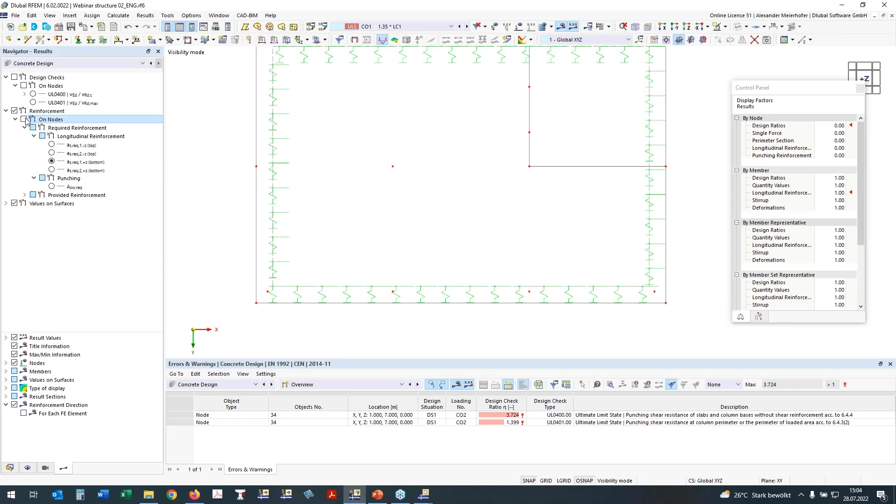This means now that the reinforcement is not enough, like I discussed before. And if we take a look at the required reinforcement of the punching node, we will see if we would need punching reinforcement or if it could be done by some additional reinforcement. We need no punching reinforcement. We can add additional longitudinal reinforcement.

So also the punching design for a foundation slab is now implemented and can be used very simply in your daily work in the design of concrete structures. Okay, this is an additional feature which I wanted to show at the end of my presentation. I will then finish and close my presentation with the picture of the punching design of the soil slab. Thank you for your attention.